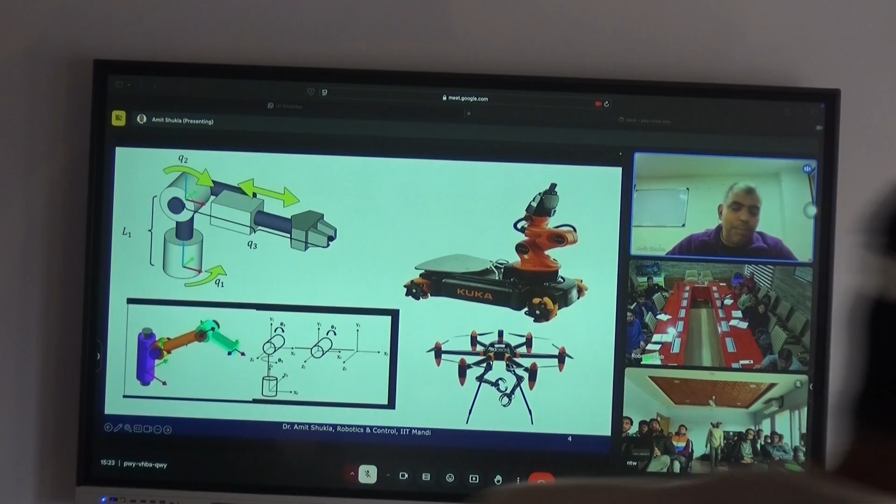Similarly, as an undergraduate in mechanics, when you solve a problem you always go for a free body diagram. Similarly, your robot may be of a complex shape, but when you draw a free body diagram, you try to put all these parameters and get an abstract model, written in the form of mathematical equations.

Once you draw a free body diagram, you write these parameter sections and define the configuration of the robot. When you write the mathematical equations, you can forget about the body, because now those equations will govern the motion of the system.

Similarly, this KUKA robot, which is a manipulator, is installed on the ground level. Let me get the laser pointer. Okay, so here you can see it has 4 wheels, which are rotational wheels, and then a manipulator attached to it. This robot's configuration space will be the parameters defining the rotation of these 4 wheels, and also the parameter defining the rotation of this joint.

So this is a very high degree of freedom system, and if you combine them, the number of degrees of freedom in the system can be very, very high. Similarly, you can have a drone, a hexacopter with 2 manipulators installed, each having 2 degrees of freedom. The configuration space here will be governed by the rotation of the propellers and also the rotation of the joint space of this manipulator.

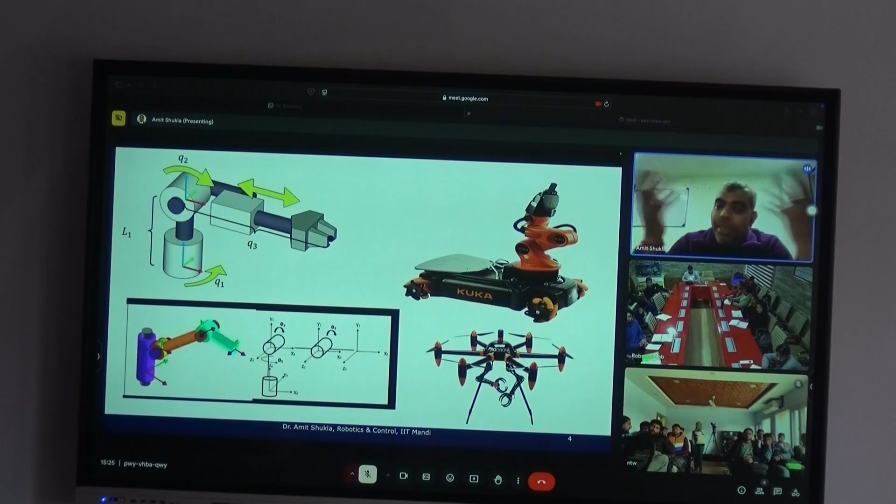For example, there are many snake robots and highly redundant manipulators. So configuration space should not be thought of as a physical space, because your physical space cannot have more than 6 dimensions. But your configuration space can be very high dimensional, depending on the kind of links and joints you have, and how the robot is connected -- you can have a very high number of degrees of freedom.

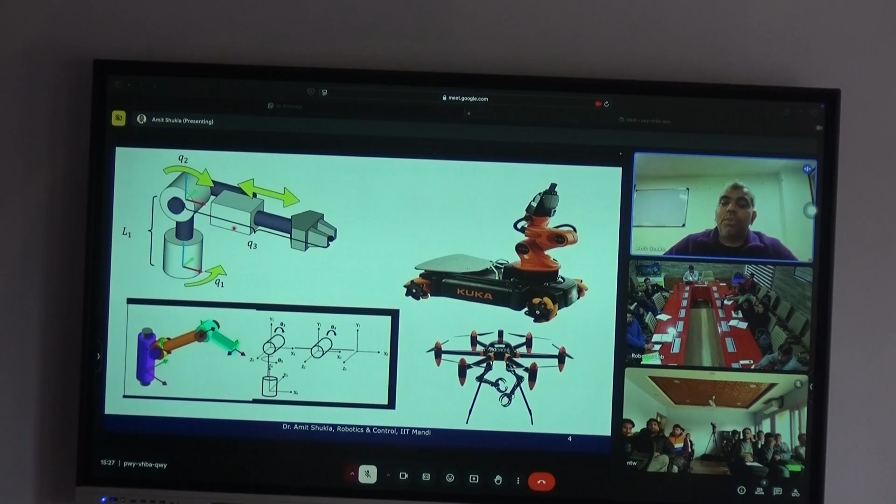But each point in a configuration space -- for example, in that dimension -- every point will give you a unique configuration of the robot. That is the definition of configuration space, and it is very useful. Why should we know the configuration space? I will come to the coming slide to explain why we require it. Configuration space is the specification of the position of all points of a mechanism.

Configuration of a robot is a complete specification of the position of every point of the robot.

What is the dimension of the configuration space? The dimension of configuration space equals the degree of freedom of that robot. What is the degree of freedom? It's the number of parameters, which should be real valued, required to define that configuration. So the minimum number of real value coordinates required to represent the configuration is called the degree of freedom of the robot. For example, in this case you require 3 parameters, Q1, Q2, and Q3. So your degree of freedom is also 3, and dimension of configuration space is also 3.

So configuration space is an n-dimensional space containing all possible configurations of the robot, called configuration space. In short, when reading research papers or robotics books, they will call it C space. This C space is defined by the degree of freedom of the robot it contains.

Let's see how we calculate the degree of freedom of any mechanism. Some of you coming from mechanical engineering may know this if you've done theory of machines with senior students. The degree of freedom of the mechanism means the summation of total degree of freedom of the body minus independent constraints of the joints.

Before we come to rigid bodies, let's see what joints are. You can have a revolute joint, a prismatic joint, a helical joint, a cylindrical joint, a universal joint, or a spherical joint. So there are different kinds of joints.

Let me give you an example. Our hand, when we bend at the elbow, this is nothing but a revolute joint, because you are able to rotate at one single axis. Similarly, when you are opening or closing a door, the door is rotating around a vertical axis. This vertical axis, by which the door is joined with the wall, is nothing but a revolute pair.

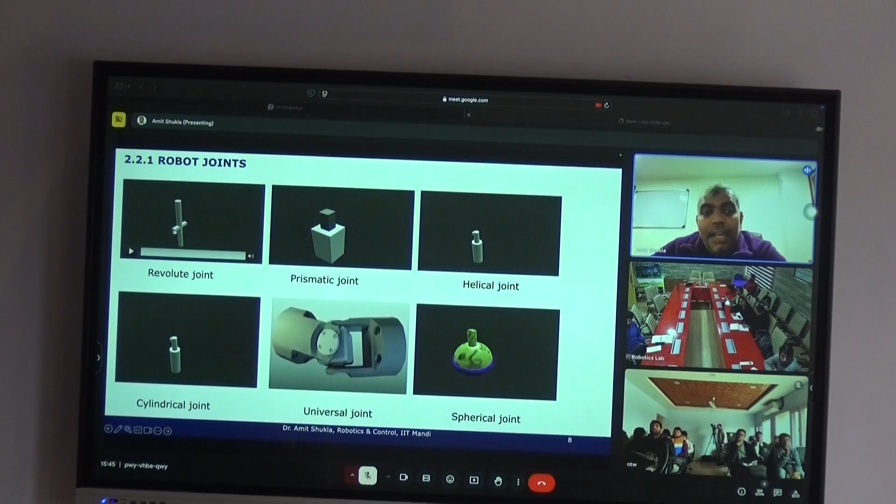Similarly, in the case of a prismatic joint, it can only translate. So it cannot move in X, it cannot move in Y, it can only move in Z. But it cannot rotate around any axis. So I'm giving 3 rotation constraints and 2 translation constraints, allowing only 1 translation - here, in the case of the prismatic joint. In the case of a rotational joint, I am giving 2 rotation constraints and 3 translation constraints, allowing only 1 rotation. So that is called a revolute joint.

Can someone tell me how much degree of freedom this joint has? I can see that it is translating and also rotating. So now let's look at what degree of freedom the helical joint has.

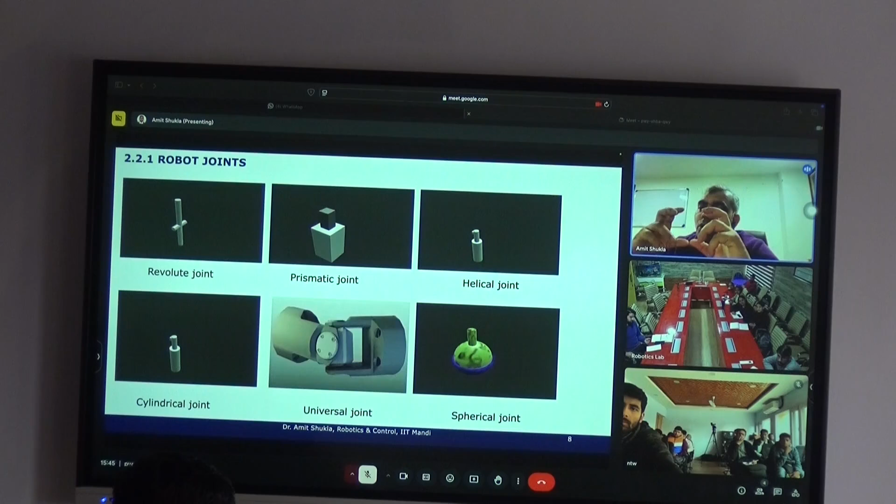Because the helical joint has nothing to do with spin motion basically. Your net motion is both spin and translation motion. You cannot independently rotate with respect to your translation. This is the helical joint. It has only 1 degree of freedom. Basically your theta and L have a relationship - there is always a relationship between pitch and rotation. You are moving L, you must be rotating theta, because there is a relationship here. They are not independent variables. As I mentioned, degree of freedom means you have to have a real value and also you have to have independent motion. If they are not independent motion, then you cannot count it separately.

Now, can you tell me about a cylindrical joint? How many components can it have? Yes, because if you try it on your hostel door, your latch can rotate independently and translate independently. So a cylindrical joint, like your latch when you close it, has 2 degrees of freedom.

A universal joint can have only 2 degrees of freedom because of rotation around this axis and rotation around this axis. So they are allowing only 2 rotations. They are killing 3 translations and 1 rotation. That's your universal joint. Universal joints are found in many mechanical systems - if you go to a mechanical workshop, you will find them. There are many such systems in your car, and manufacturers in car markets use many universal joints.

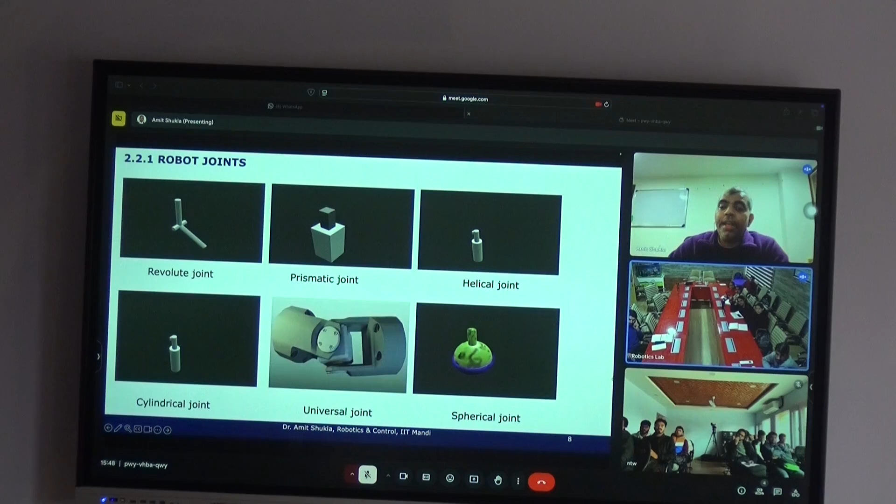So that's how to calculate the degree of freedom. Now, Gruebler's formula in a broad way will look like: degree of freedom equals m into (n minus 1 minus j), plus summation of f_i, the number of joints. Each joint has a degree of freedom.

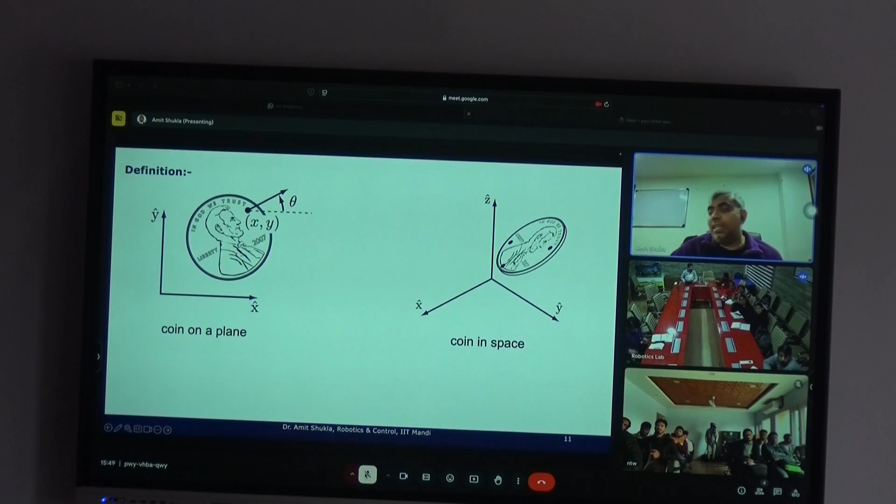So this coin in a plane, as I mentioned, is going to have only 3 degrees of freedom. You can have an XY to locate the center or any given point, and also the rotation of the coin, at which angle Abraham Lincoln is seen. So it has only 3 degrees of freedom. But if I take the same coin as a rigid body in a spatial dimension, it is going to have 6 degrees of freedom.

So Grübler's formula is valid both for open chain mechanism and closed chain mechanism. What is the open chain mechanism? It means where the links are connected and the final link is open, not closing the loop. That is the open chain mechanism, like our hand - our hand is an open chain mechanism. All the links are serially connected, meaning they are connected one after another. So that's the open chain mechanism, and Grübler's formula is valid for it.

This formula is also valid for closed chain mechanism. Closed chain mechanism means when you stand on the ground with both of your legs touching the ground. What happens? From the lower part of your body, a loop goes from one leg to another leg and then comes to the ground. You are closing the loop. So this is called closed chain mechanism, or closed loop mechanism, where a person standing with both feet on the ground is the example.

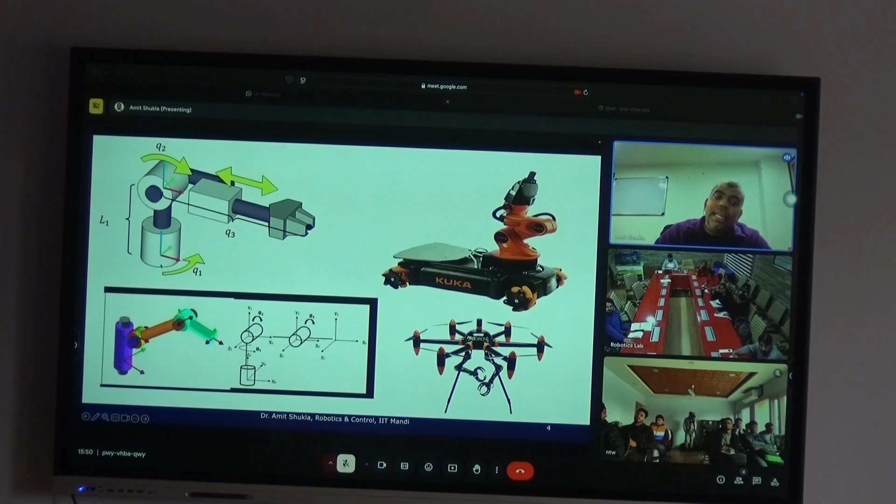So there is an open chain mechanism and a closed chain mechanism. The most common example of open chain mechanism is a serial manipulator. Most of the time you will find in manufacturing industry serially connected links, like for example here - this is an open chain mechanism because the link starts from here, the ground link is here. All the links are serially connected and the last link is left open. This is called open chain mechanism.

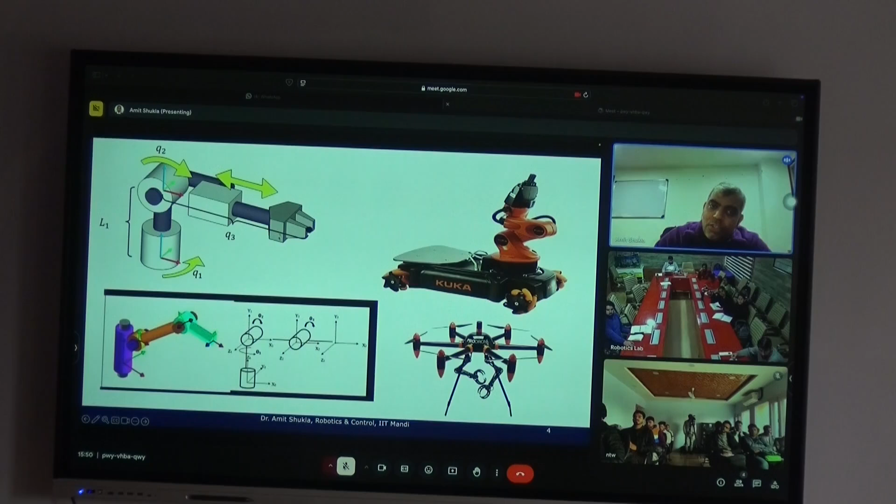But if I connect another link from the last link and close it to the ground, this becomes a closed chain mechanism. Like I'm sure you must have seen the 4-bar mechanism - they are closed chain mechanisms because the loop is getting closed. So links or mechanisms can be open chain or closed chain, and Grübler's formula is valid for both of them.

So let me derive Grübler's formula from the degree of freedom of a 4-bar mechanism. How do I calculate degree of freedom? First, I have to know small n - whether it's a planar mechanism or spatial mechanism. In this case, as I mentioned, it is a planar mechanism, so small n is going to be 3.

What is capital N? I have to count the number of links. So this is link number 1, link number 2, link number 3, and the ground is also counted as a link, so I have 4 links total. Capital N is going to be 4. So it's 3 into (4 minus 1 minus j). How many joints do I have? Let me count: joint number 1, joint number 2, joint number 3, joint number 4. So I have 4 joints and 4 links.

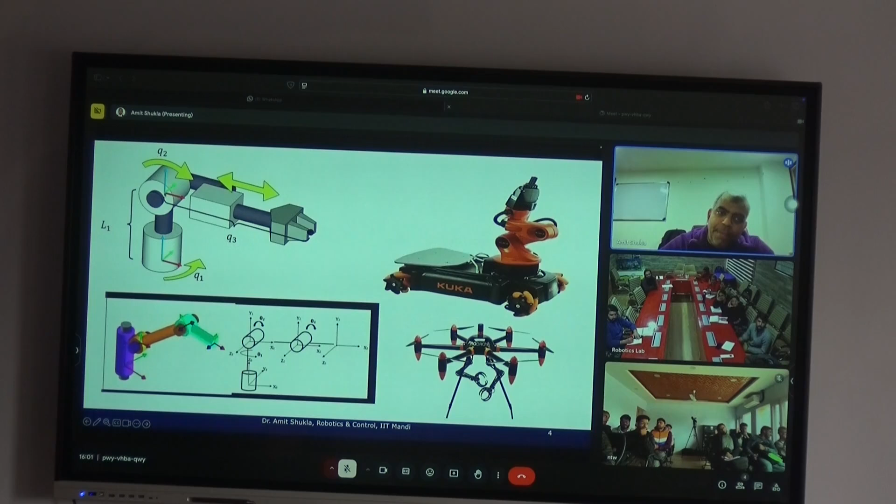So what I will do is put a frame here - this is the fixed frame - and I will put another frame here, which is the body frame. Once I have the body frame, I will forget about the nature of the body. I just bring the frame.

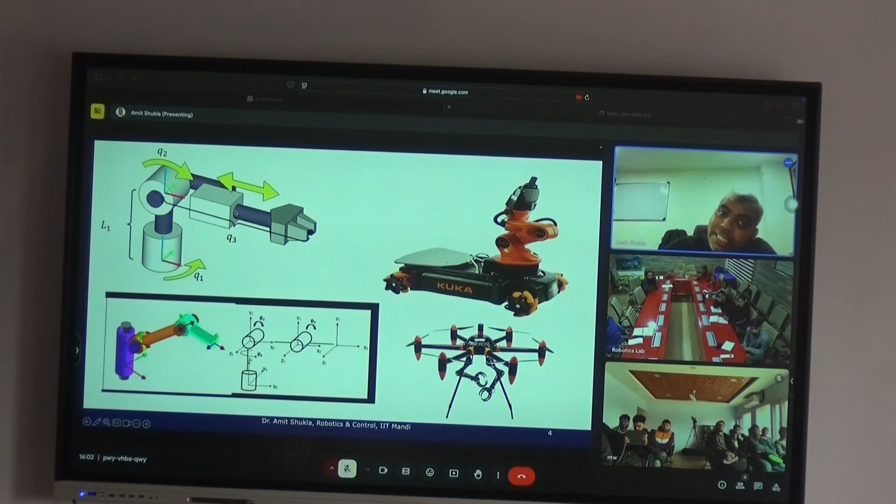So the motion of this frame, with respect to the motion of the space frame, will let me define the configuration. Because if this frame is rotating with this frame, I know that this link is rotating with this link. Similarly, if I put the frame here also, when this frame is translating with respect to this frame, I know that this body is translating with respect to this body.

This means you forget about the shape and size of the body - you fix the frame and then plan the motion of that frame. When you plan the motion of this frame, you are able to write the kinematics of the body. That is what we will be doing in this section. I don't have much time, so I cannot go into detail on how we write it, but I will give you a high-level overview. So I have a rigid body.

In that rigid body, I will fix a frame, and this frame is moving and rotating with respect to this other frame. As I mentioned, when there are two frames, they can rotate with respect to each other and they can translate with respect to each other. So there can be three translations and three rotations. For example, I will say that this body is rotating.

And that's how I have multiple links. At each link I will put a frame, and then I will plan the motion of each frame with respect to the previous frame or with respect to the ground frame. That way I will be able to write the kinematics.

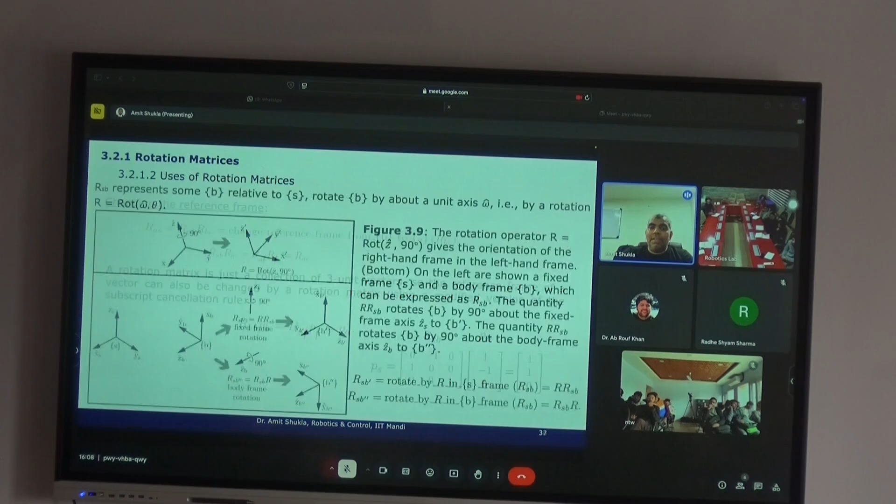And that relationship is governed by this rotation matrix R, looking at the rotation, and then the translation. Translation means how much the origin of the body frame is translated relative to the origin of the space frame, so we write this translation vector. This rotation and translation together represent the configuration of the body frame. So I will first form this.

Let me come to the kinematics part quickly. What you do when you write the global kinematics is put a frame at each joint - base frame, the next joint, at each joint you put a frame, and then your end effector frame. Kinematics means I want to know the orientation and position of the end effector frame with respect to the base frame. That is called forward kinematics. Although you can have many intermediary frames as well, when I calculate the orientation and translation of the end effector frame with respect to the base frame, I am able to write the forward kinematics. So forward kinematics means I have a joint space like theta 1, theta 2, theta 3, or Q1, Q2, Q3, and from joint space I am able to calculate the orientation and translation of the end effector frame. Forward kinematics is always unique in a serial manipulator.

What does inverse kinematics mean? If I tell you where the end effector is, can you tell me what my joint angles is - what is my Q1, Q2, Q3 and so on? That is called inverse kinematics. If I give you x, y, z and the orientation, can you calculate what my joint angles is? That is inverse kinematics.

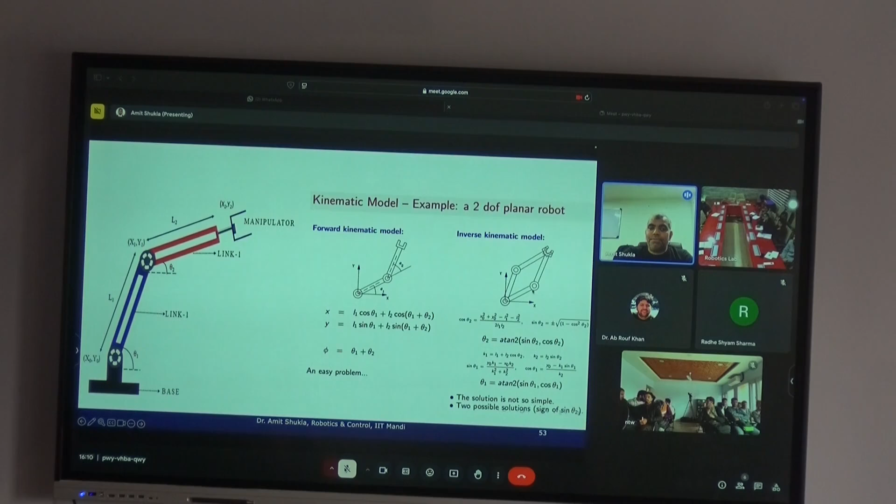Unfortunately, inverse kinematics has multiple solutions. For example, the end effector is here, but it has two configurations - it can have an upper hand configuration or lower hand configuration. So inverse kinematics can have multiple solutions, but forward kinematics always has a unique solution. If I give you theta 1 and theta 2, the position x, y is fixed. But if I give you x and y instead of the end effector's theta 1 and theta 2, they are not unique because they form a second order polynomial equation, and this quadratic equation has two solutions - so you have upper hand condition and lower hand condition. This is forward kinematics and inverse kinematics.

Is it making sense to everyone? Yes sir, yes sir. Any questions here? I think we are running short of time, so let's go ahead.

This robot kinematics and dynamics extends through various courses, and covering it in one short lecture is nearly impossible. But I hope the students have got a good sensitization about this introduction to robotics, kinematics and dynamics, which I believe is very important when designing robotic systems.

Thank you very much sir. I think Dr. Adisham has already joined, so thank you sir for this insightful lecture. I hope the students have got sensitized about that. We all thank you for that. Thank you, thank you very much. Thank you for giving the opportunity to present my work. Thank you, thank you sir.

Hello. Yes sir, it didn't make it, but still it's good to see you online also. Yeah, actually there were some unavoidable reasons and other commitments, so we could not come there, but we will try our level best to come sometime in the near future. Yeah, yes, okay thank you sir.